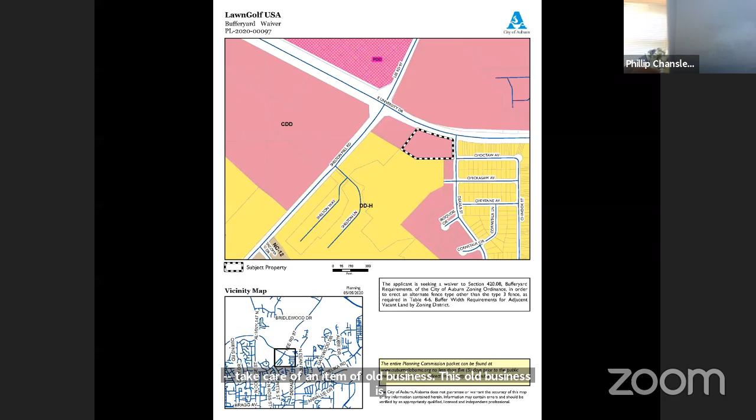All right, I'm seeing no hands raised. So seeing no one, I'm going to move along. The first thing we'll do is take care of an item of old business. This old business is LawnGolf USA, PL 2020-00097, a waiver request dealing with the fencing and materials.

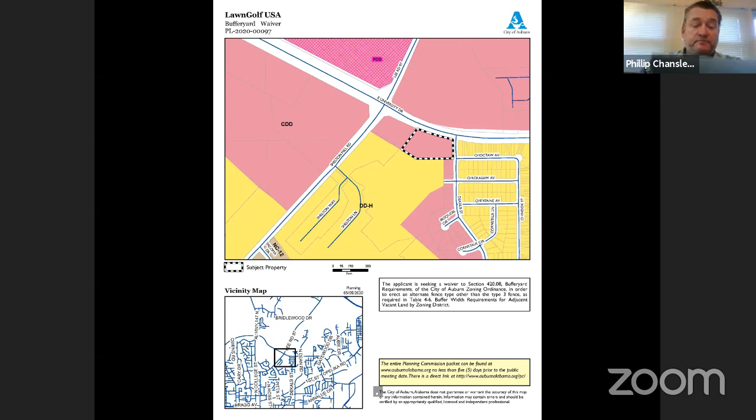Let's have Katie Robinson. Are you there to address this? Yes, I am here. Good afternoon. This is a request from Ron Watson for the property located on the corner of DeKalb Street and East University Drive. They are requesting a waiver to the fence requirements as part of buffer yard requirements for property adjacent to vacant land by zoning district.

The property is zoned CDD and is surrounded by DDH to the south on a majority of that south property line, as well as CDD, which is a single family area. Approximately 483 feet of that south property line is adjacent to the Shelton Mill Townhome development, but that portion is undeveloped at this time, so it's vacant. So they are required a type 3 fence as well as a 20-foot wide buffer.

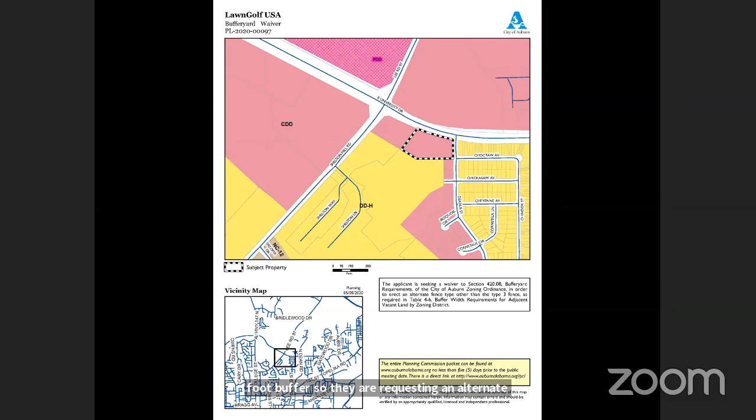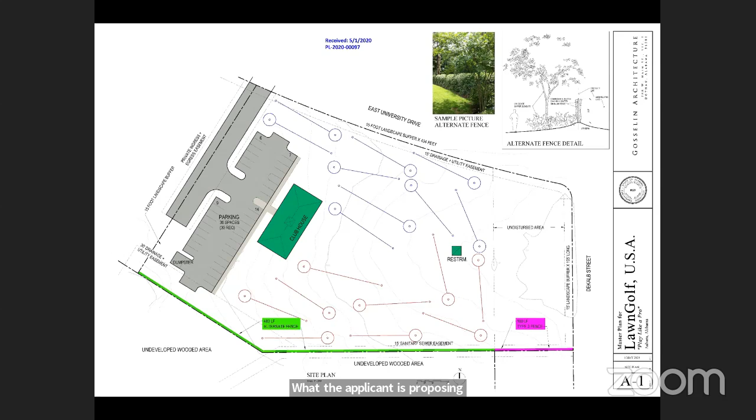So they are requesting an alternate fence type to that type 3. A type 3 fence is a 6-foot masonry wall or stucco type fence, or a 2-foot berm with a 6-foot stockade fence with decorative design, or columns of brick or stone. So what the applicant is proposing is a living green fence along a majority of the property line that would be a vinyl coated chain link fence with Confederate jasmine or another type of vine growing on the fence.

In addition to that living fence, they are also required to do their landscaping requirements along that fence. On the last page of the staff report, I've included the landscaping material that they will be required to plant. We do recommend approval of the alternate fence with staff comments.

And I will add that the pink portion that you see, since that is the same zoning type as this property, and is a single family performance home, there is no fence requirement in this location. It is, however, a 15-foot wide buffer yard, and the applicant has agreed to provide an actual type 3 fence in this location to separate the single family neighborhood from the property.

Part of the conditions that I mentioned are noted in the staff report, and Water Resource Management has added a condition since your meeting on Monday that although the fence is shown now to be in the location of the 15-foot drainage and utility easement across the south, when the plans come in for development review team, the fence will be located outside of that easement. And I received no correspondence on this case.

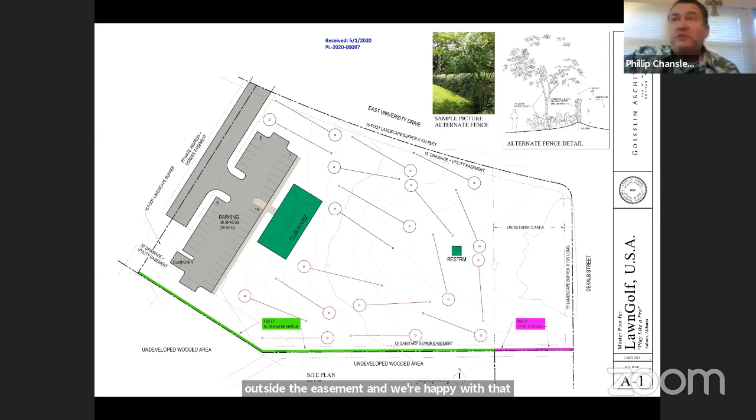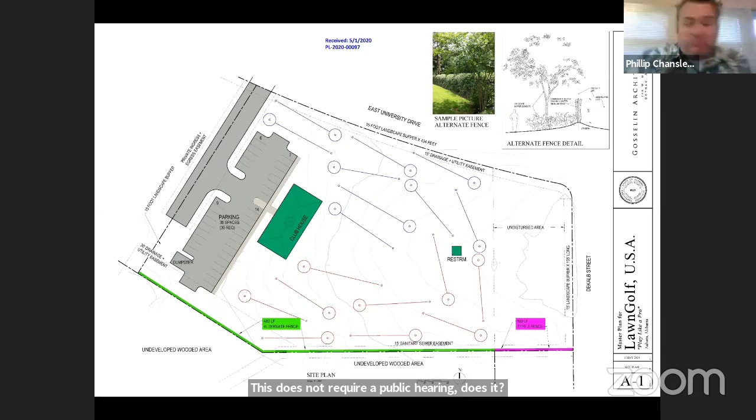Is that it? All right, so, sorry Forrest, this does not require a public hearing, does it? No, sir, waivers do not. Right, okay. So that brings it up to any kind of discussion or a motion.

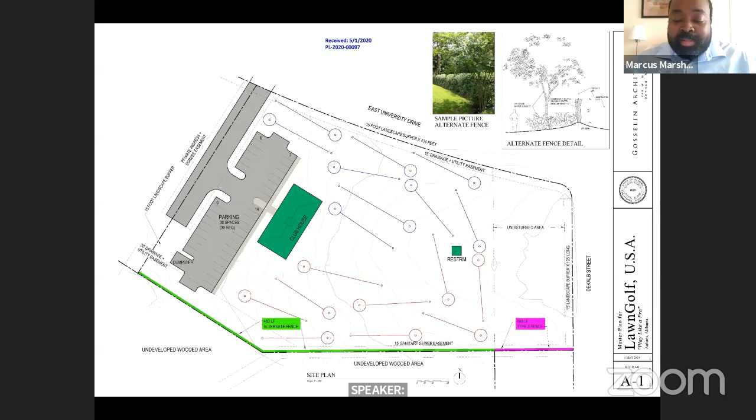Okay. I know last time I had a potential issue with the multiple waivers and things going on. But if the staff is comfortable with this type of fence, then I'm comfortable as well. So I'm ready to make a motion, if that's okay.

I'll make a motion. Move to approve PL 2020-97, LawnGolf USA Buffer Yard Fence Waiver, with all staff comments. And I will second that. I appreciate the living fence. Thank you.

Okay, so now we have a motion and a second. Is there any further discussion? Okay, hearing none, seeing no hands. All those in favor, let's see, I guess we're doing a roll call, right?

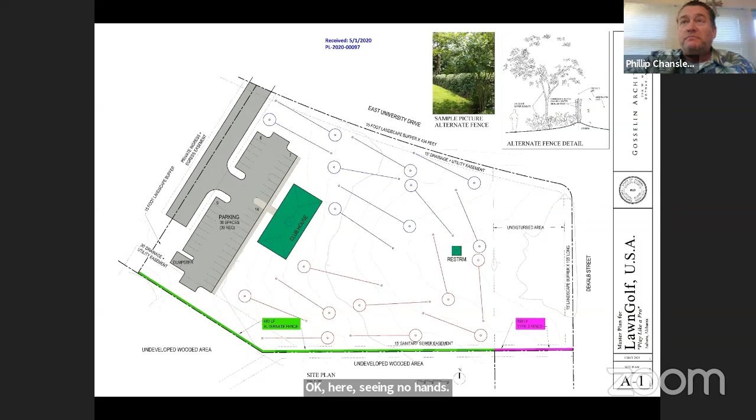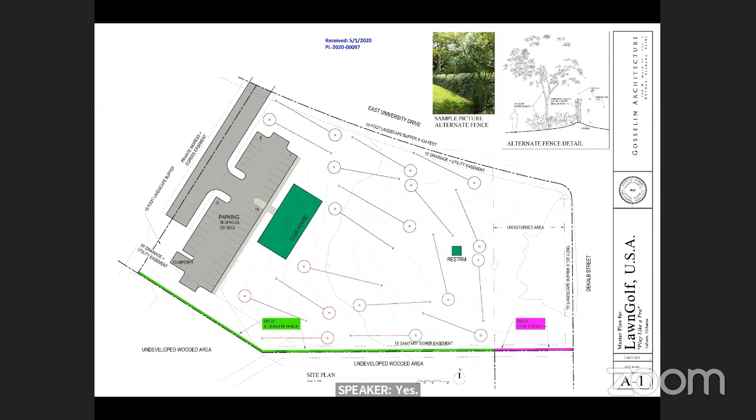Amber? Yes, I'm ready. Bledsoe, Yes. Chansler, Yes. Lazenby, No. Marshall, Yes. McCord, Yes. Reese, Yes. Reitenbaugh, Yes. Okay, that motion carries.

Okay, we're going to move into the next item, but we have a consent agenda, and we've also got a number of issues that the applicant has asked to postpone. There's a total of 8 of those items that will be taken from the agenda tonight. Now, what I'd like to do is try to dispense with all that right here up front. I'm going to go through a number of administrative tasks just to handle it, so see if we can follow along here.

So the first thing I'll do, before we address the consent agenda, is note that one of the items to be postponed till the next meeting is PL 2020-00155, the Gibson property annexation. The first order of business would be to make a motion from the chair to remove this particular item from the consent agenda. Do I have a second?

Second. A motion and a second. Is there any discussion? This item will be postponed. Okay, hearing none. All those, let's have a quick vote. Amber, this is to remove the item. Yes. Chansler, Yes. Lazenby, Yes. Marshall, Yes. McCord, Yes. Reese, Yes. Reitenbaugh, Yes. Okay, motion carries.

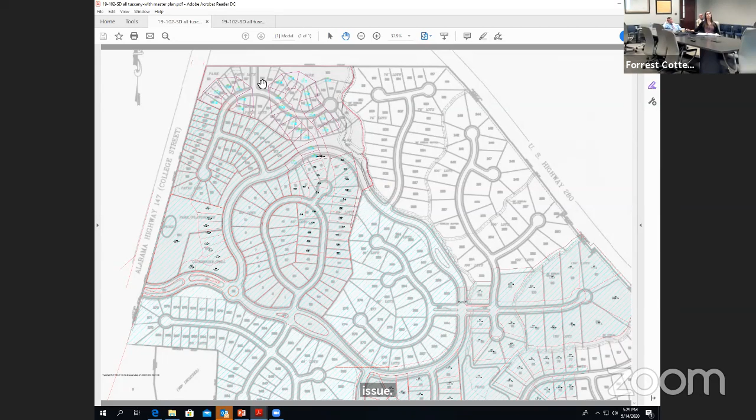Yes, I would like to add a couple things. One, the two cul-de-sacs, on Canal and Sophia that terminate, the original layout had 40 plus lots up in that area. Because of the rock and topography, we are approximately 20 plus lots in those areas, so we've had to decrease the number of lots. I was also working for Trey Salato and Dennis McIntyre when they were doing this original phase, and Trey said they thought they were opening a subdivision, but what they really opened was a rock quarry. They spent a significant amount of time blasting rock trying to make it work, and it essentially bankrupted them, so we're trying to avoid getting into a money pit.

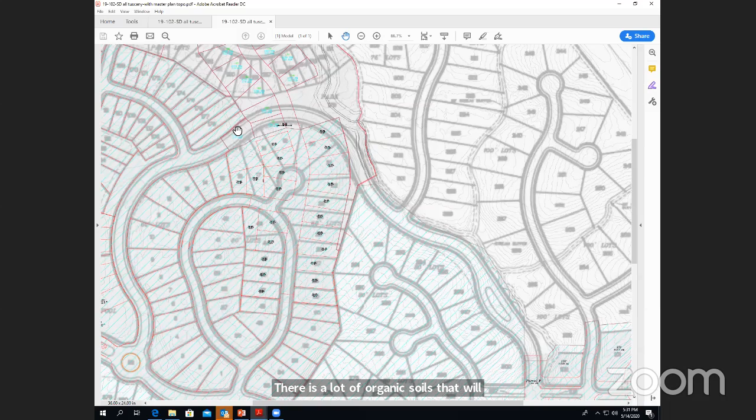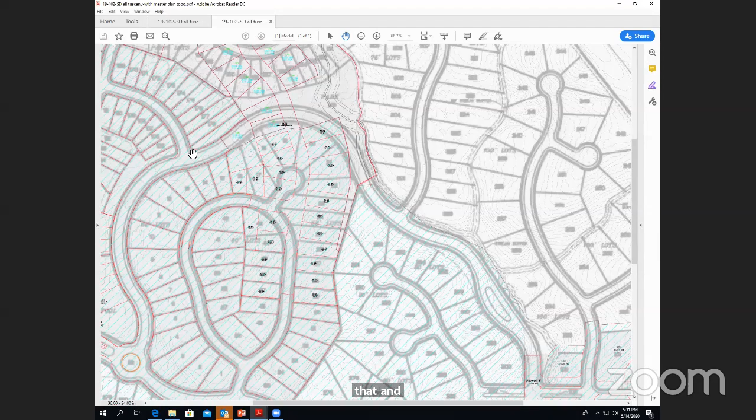So that's as far as the connection on Sophia and Canal. I'd like to address the connection on Tuscany or Tivoli Boulevard, the connector road that goes along the creek in the master plan. Were we to carry that forward, we've done soil borings out where that boulevard would connect in a big loop, and there's a lot of organic soils in that area. That's the lowest point on the road, and bringing a road through there would be damaging to the ecology and difficult to build. On top of that, a large portion of that road planned in the master plan has since already been developed by Stowe Martin Builder to the east. So there's really not an easy way to bring that stub road through without losing stormwater detention and placing the road in an ecologically sensitive area with the creek that runs along the east side of this development. If you have any other questions, I'm listening in, glad to answer anything else.

Okay, thank you. I guess I'd like to turn to Ms. Frazier and see if this is all information you've had before, and whether comments stand.

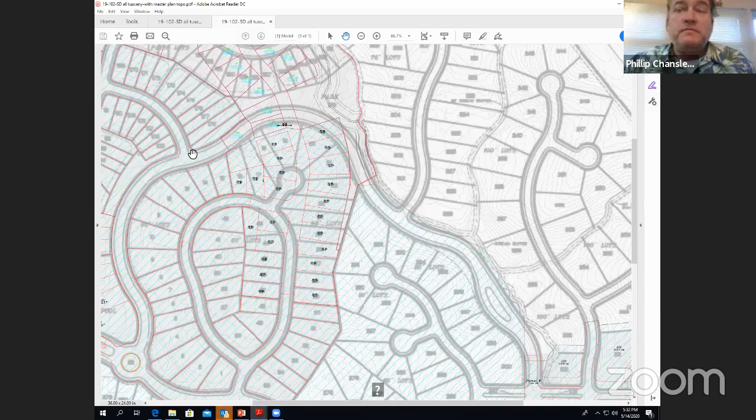Yes, we did receive this information from the applicant. We do understand there's rock there. It's not an impossibility to build on, but it does create some challenges. There is additional information Mike nor Brandon mentioned. There's an existing stub of Tuscany Hills Drive near where Stephanie's hand is, right there. The current road ends right there as well, and they're also proposing not to continue that through to at least connect to Sophia Court.

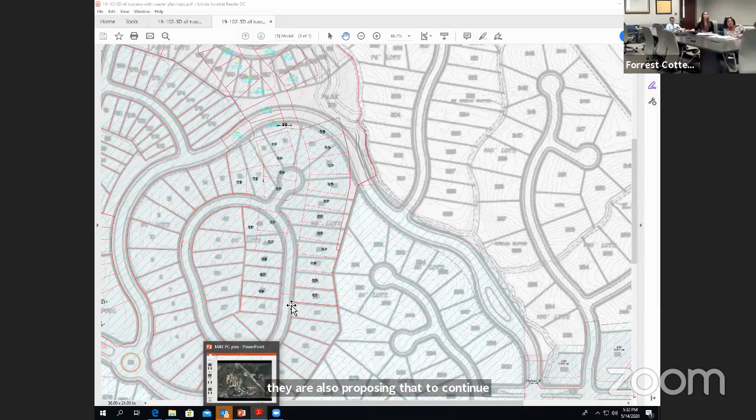If you go back, can you go back to the aerial? So it does just provide additional connectivity. So at the end, yes, right there, the existing roadway stops there, and the applicant is proposing a lot at the end of that. We would definitely prefer that it connect through to Sophia Court as well.

Is that the stub out you reference in the comments? Yes, it is. Okay.

Warren McCord: Yes, I'd like to ask Mr. Bolt and others representing the applicant. One of the things we often hear when we talk about things like stub outs, and you are dealing with a very difficult thing, but you always talk about it in generalities. Can you give me some specifics as to what kind of economic liability you would be taking on to try to make at least one or more of these connections? You just say it's going to be a money pit. What are we talking about? Can you phrase that in terms of cost per lot or something? The owner has reached out and tried to get some cost estimates, but it's very difficult to get cost estimates on blasting.

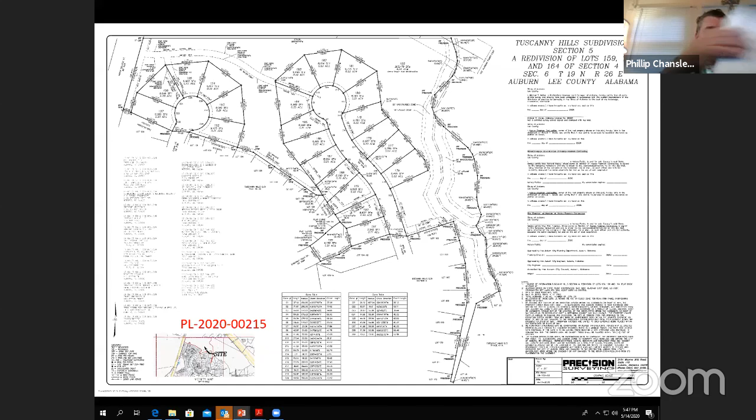Well, I guess that gets us to a point where — Warren McCord, please. Yes, I just want to clarify with Mr. Bolt. We had been talking about the problems of connectivity in these other places because of rock and the cost of blasting, and that was fairly convincing to me. However, when we talked about this connectivity, he merely said he and his traffic engineer thought that it provided no useful purpose. I'm trying to figure out, is he talking about useful purpose to his project, or useful purpose for circulation that's concerning our engineering staff?

Well, in particular, so the construction plans were checked for what you see as drawn. I'm sure there is rock there, but that design hadn't been done. The not connecting those two — we didn't see that there was a benefit for circulation. So we're basically dealing with two different opinions, I guess. Okay.

Okay, I guess that brings us to a point where... can you pull me back to the other map of this, where it shows the actual Tuscany Hills, Canal, and Sophia?

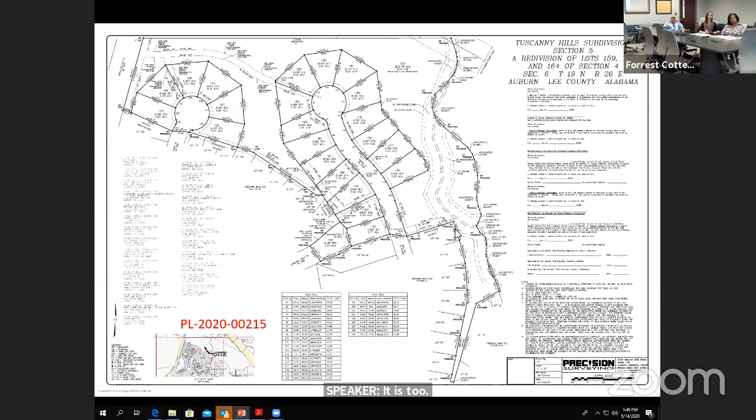Personally, I'm prepared to make a motion. I don't know where everybody else stands. I'd like to move to approve PC Case PL 2020-00215, Tuscany Hills Section 5 preliminary plat with staff comments, while omitting connectivity between Sophia Court, Canal Court, and Tuscany Hills Drive.

That one comment, I can second that motion. Okay, we have a motion and a second. Is there any further discussion from the commission? Yeah, Mac Lazenby, yeah.

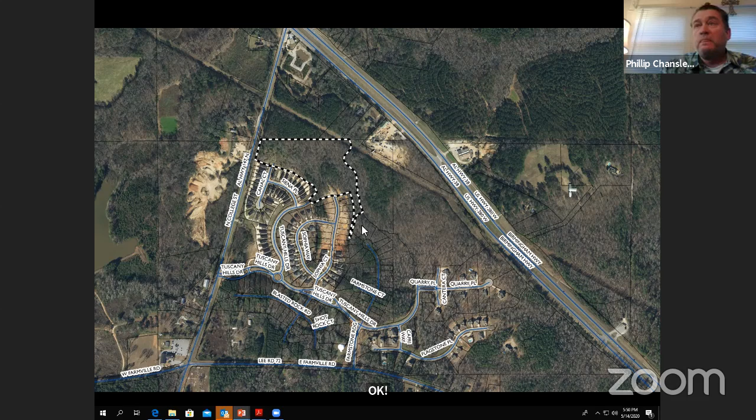Break that motion down a little bit. You're insisting that the cul-de-sacs be connected, if I understand right? I am... yeah... not insisting they be connected. Okay, all right, I understand. Thank you.

But she is, clarification is warranted. She is insisting, though, that the comment regarding the stub out of Sophia Way to the undeveloped property to the east stay in the comments. Is that correct? I will amend that to remove recommend stub out of Sophia Way to undeveloped property to the east.

Oh, you take both of those out. You're correct, I'm sorry, yes, I'm amending the motion. All right, so now we have an amendment. Okay, so the amendment is... the motion was approval with all staff comments except the connectivity comment. Now there's an amendment to that that says also remove the stub out comment.

So let's have a vote first, let's have a vote on the amendment first. Go... I'm not sure it has a second. No, it does not have a second. My second was the first part of that, her first amendment. Sorry, do we have a second to the amendment?

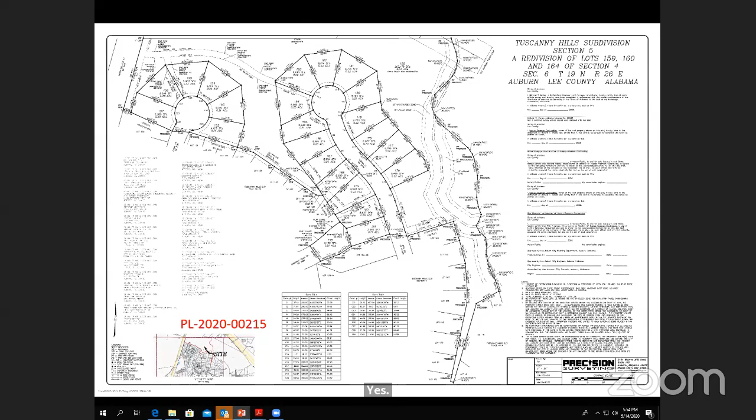Okay, Bledsoe, no. Chancellor, yes. Lazenby, yes. Marshall, yes. McCord, yes. Reese, yes. Reitenbaugh, yes. Okay, that motion carries.

All right, we're going to move on to item number 15, which is Woodward Oaks Phase 2, PL 2020-00228. This is a preliminary plat approval for a performance subdivision. Mr. Kip.

Yes, everybody hear me? Can now. All right, this is a preliminary plat request for a lot subdivision in Woodward Oaks Phase 2. You recently saw this approved overall subdivision back in September. The purpose of this replatting is essentially to create one new lot. The property owner is Clayton Properties Group Incorporated, and their authorized representative is Brett Basquin. Here, you can see the lots there. That kind of rectangular lot is the new lot being created. And Forrest, if you could advance to the next slide, please.

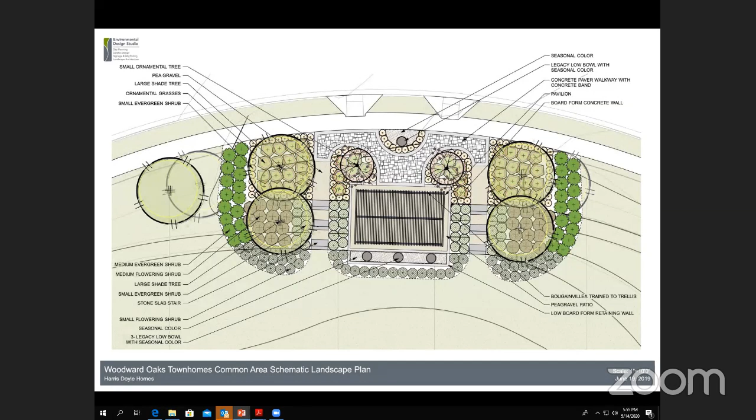They're wanting to subdivide out this lot to do a kind of community pavilion. Staff has no objection to this, and we recommend approval. And there's an aerial of the property and surrounding development.

Okay, thank you. Mr. Basquin, if you have anything to say, raise your hand. Otherwise, I'm going to move along. Okay, this requires a public hearing, so at this time I'm going to open the public hearing for anybody who would like to speak. So please raise your hand.

27 attendees, seeing no hands raised. I'm going to close the public hearing and ask for questions, comments, or a motion from the commission.

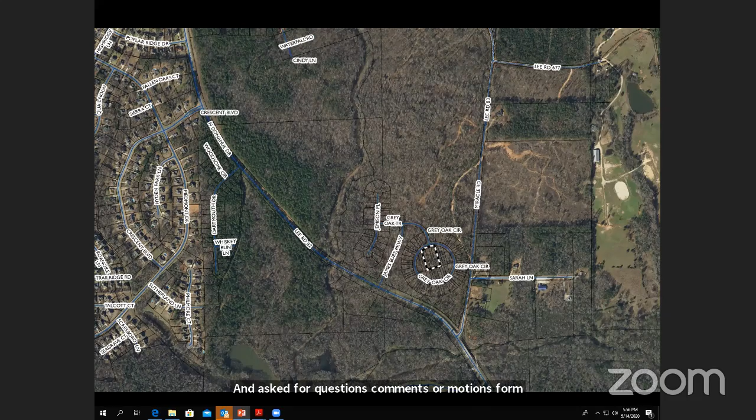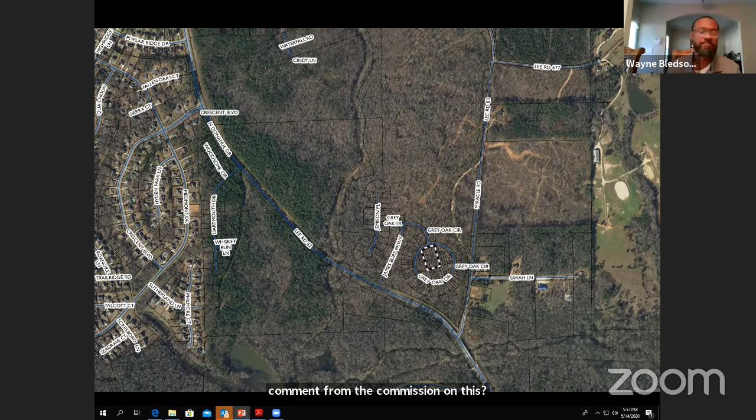I move to approve item 15 on the agenda with staff comments. Second. Okay, I have a motion and a second. Is there any further discussion from the commission on this? All right, let's have a vote. Bledsoe, Yes. Chansler, Yes. Lazenby, Yes. Marshall, Yes. McCord, Yes. Reese, Yes. Reitenbaugh, Yes. Okay, motion carries.

The next item is Woodward Oaks Phase 2. This is the final plat for the same property, case PL 2020-00229, and it does not require a public hearing. Is there questions, comments, or a motion from the commission?

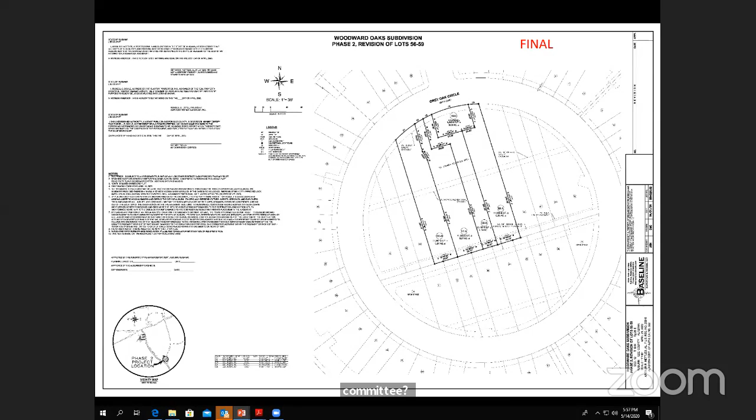Move to approve item 16 with staff comments. Second. Motion and a second. Any further discussion? Bledsoe, Yes. Chansler, Yes. Lazenby, Yes. Marshall, Yes. McCord, Yes. Reese, Yes. Reitenbaugh, Yes. Okay, motion carries. The next item on the agenda is Yarborough Farms Sawgrass.

It's a redivision of lots, PL 2020-00240. Mr. Howell: Good evening. This request before you is a request for preliminary plat approval of a 4-lot performance residential subdivision of 2 lots. As you can see on the proximity map here, it's roughly at the intersection of Titleist Way and Yarborough Farms Boulevard in the Yarborough Farms Planned Development District, with a CDD base zoning district.

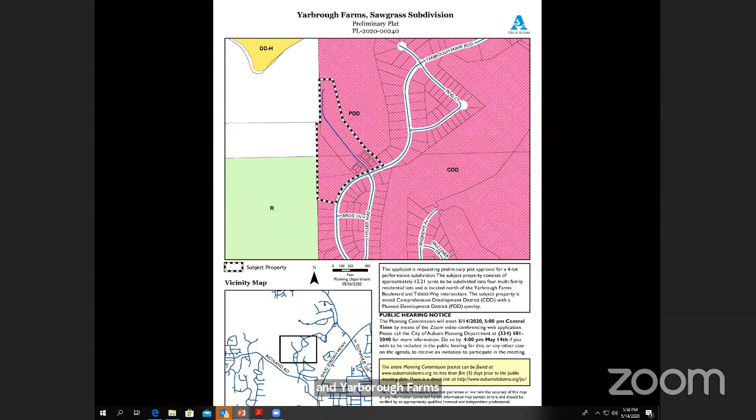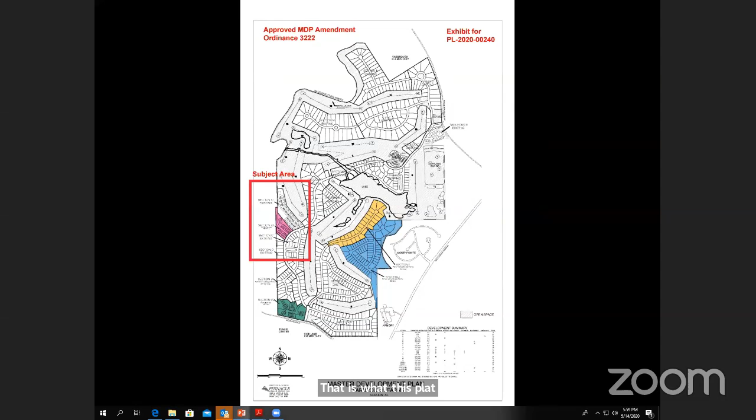Next slide. This plat is roughly the general area, the subject area. It includes section E2, E1, and the northern portion of section D of the master development plan for Yarborough Farms PDD. The plat itself is in keeping with the MDP. Most recently, it was approved by the city council to change the use types from section E2 from single family to multifamily, and that is what this plat proposes, with 19 units as was allowed. Next slide, please.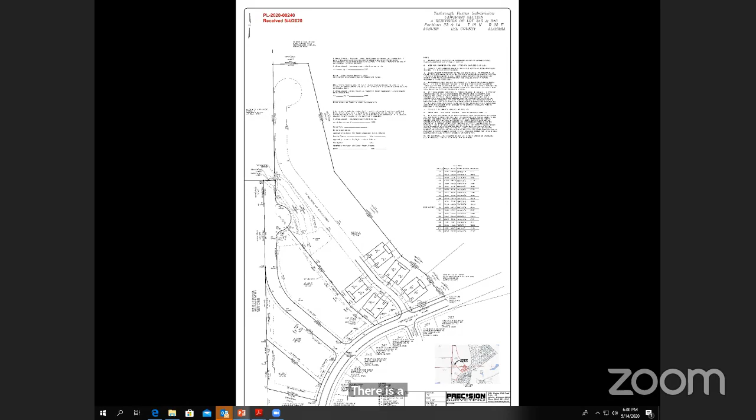Phil, you're on mute. I'm looking over at the attendees. Mike Mayer, if you're still there and want to say something, raise your hand. If not, we'll go ahead and move along. So this requires a public hearing. At this time, I will open the floor for the public hearing. If you'd like to speak on this item, please raise your hand and I'll recognize you. 27 attendees, I see no hands, and so I will close the public hearing and ask the commission for questions, comments, or a motion.

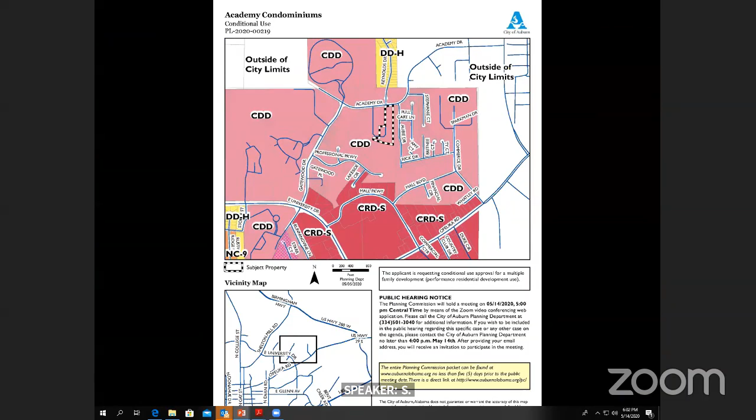I move to approve item 17 with the staff comments. Second. Okay, we have a motion and a second. Any further discussion? Bledsoe, Yes. Chancellor, Yes. Lazenby, Yes. Marshall, Yes. McCord, Yes. Reese, Yes. Reitenbaugh, Yes. Okay, motion carries. All right, the next item is item number 18, the Academy Condominiums, PL 2020-00219.

Ms. Kennedy: Yes, this application comes from Rob Selby on behalf of CLNS Subdivisions LLC, which are the property owners. They're requesting conditional use approval for a performance residential use, which is a multifamily development at 1630 Academy Drive. This is within the Gardens at Gatewood subdivision, east of the Gatewood Drive intersection of Academy Drive, as you can see in this map. The property is on CDD.

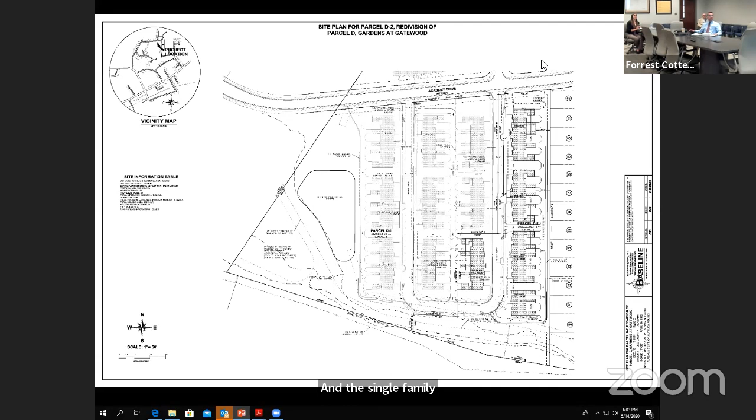The development being proposed consists of 5 new buildings and 23 condo units. This section of the development is located between a previous phase of the multifamily development, as you can see to the west there, and the single family portion of Gardens at Gatewood. The proposed use is in line with the surrounding neighborhood, as you can see, it's mostly residential. The future land use plan has it designated as medium to high density residential, so it is in line with that as well.

This master site plan was originally submitted in May of 2004 for the original conditional use. We're bringing it up to you again now because there has been a lot of communication regarding this development and conditional use, so for your information, we've included it. These 5 new buildings, as you can see, are in line with the original proposed master plan. On parcel B, on the northeast side of this plan, that portion also went through an additional conditional use application in 2017, which was approved, and is in line with this as well.

These items have been brought back to the commission due to the time passed since the original application, as well as a name change to Academy Condominiums rather than the Gardens at Gatewood Condominium. As I mentioned, we've received numerous communications regarding this case. I believe a lot of the attendees are folks wishing to speak in the public hearing, so we had a lot of calls on how to register as well as basic information. We did receive 2 emails wanting a little bit more detail or expressing a bit more concern, so I'd like to go ahead and address those for you.

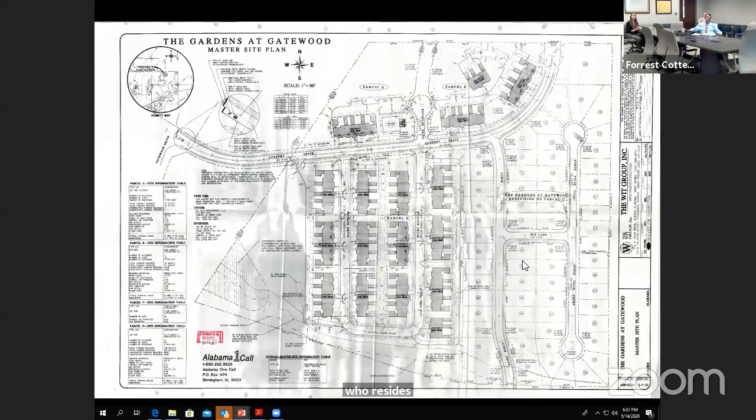The second email we received was from a Mr. Agnew, who resides at 1992 Stephanie Court, which is part of the Hilltop Pine subdivision, adjacent to the single-family residential portion of the Gardens at Gatewood. His email concerned density of the housing of the area, as well as associated open space in relation to that density.

In response to his email, we've evaluated the overall open space of this multifamily development in accordance with Table 4.2 and Section 505.06 of the zoning ordinance. Table 4.2 states that any performance residential development in CDD must have 25% open space, and Section 505.06 states a stage development in CDD must have open space ratio of 15% per stage.

Previous stages of this development have exceeded the 15%. That would include parcel B, this previous development to the west of the proposed, and parcel A, where the pool is located. All of those sections exceeded their 15%. The entire multifamily development prior to this new construction is at 29% of its total area being open space, so it exceeds the regulations set forth in the zoning ordinance.

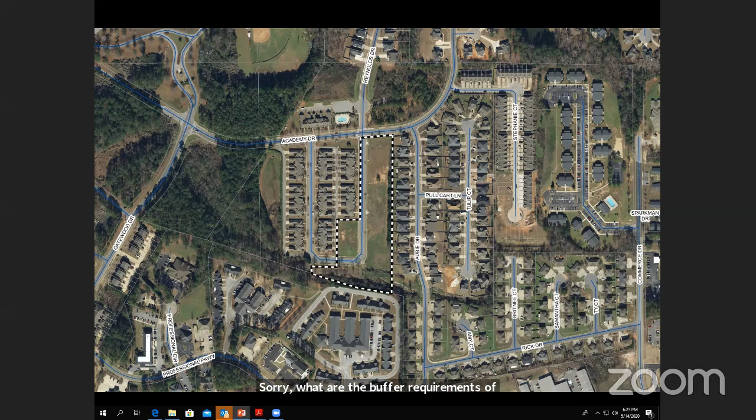You have to unmute there, Mac. Sorry, this is to staff. What are the buffer requirements or fencing requirements on the east side of this property, as it butts up against the single family homes? Have they met those requirements or exceeded them? I'd just like to know what they are.

If not, I'm looking for a motion. I move to approve PL 2020-00219 with staff comments. Second. I have a motion and a second. Any further discussion from the commission?

All right, Ms. English. Bledsoe, yes. Chancellor, yes. Lazenby, yes. Marshall, yes. McCord, yes. Reese, yes. Reitenbaugh, yes. Okay, motion carries. Item number 19, Graduate Hotel, PL 2020-00223, Mr. Kip.

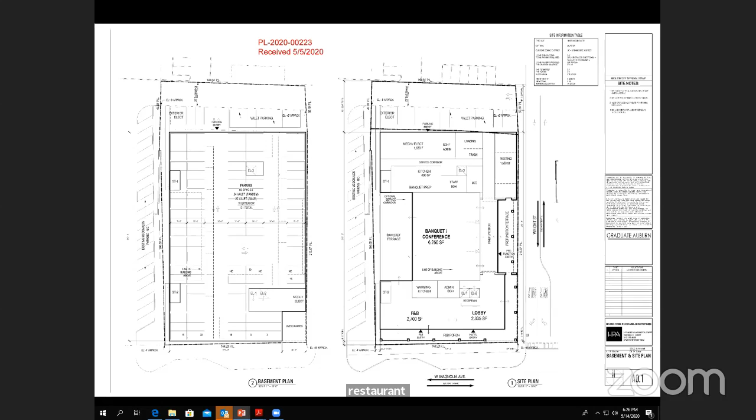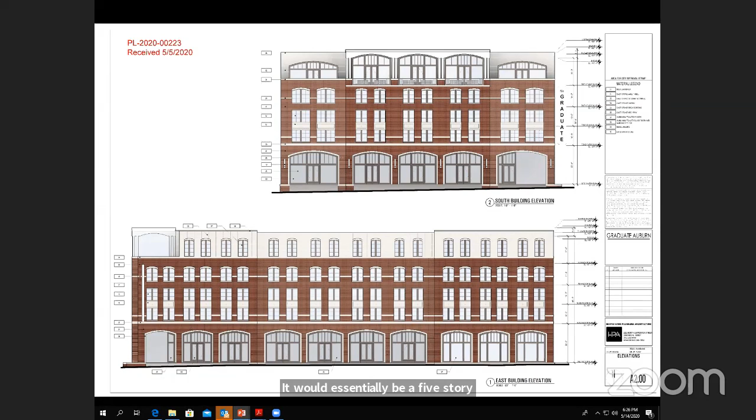Here's a site plan showing that some of the parking would be below ground. There'd be a banquet conference center, lobby, restaurant, and fitness center. If you could advance to the next slide, please. These are some preliminary renderings of the architecture. These would go before the downtown review committee, but it would essentially be a 5-story hotel with 177 hotel rooms, along with the additional amenities I mentioned.

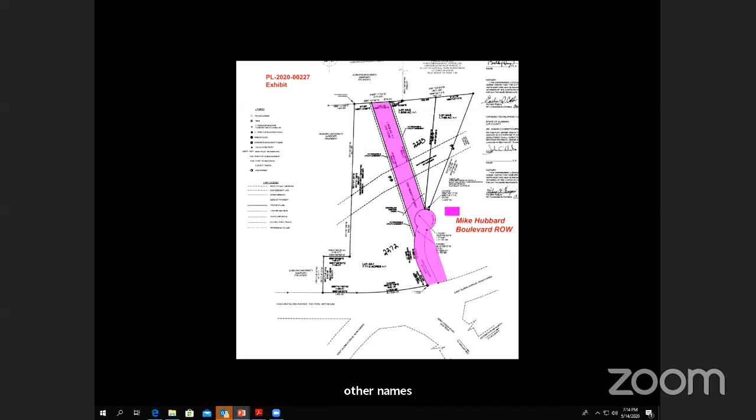We did receive some correspondence on this, including recommendations for other names and considerations. The first was a recommendation to consider the name Benny G. Atkins, and the second was a consideration to rename it Robert G. Pitts.

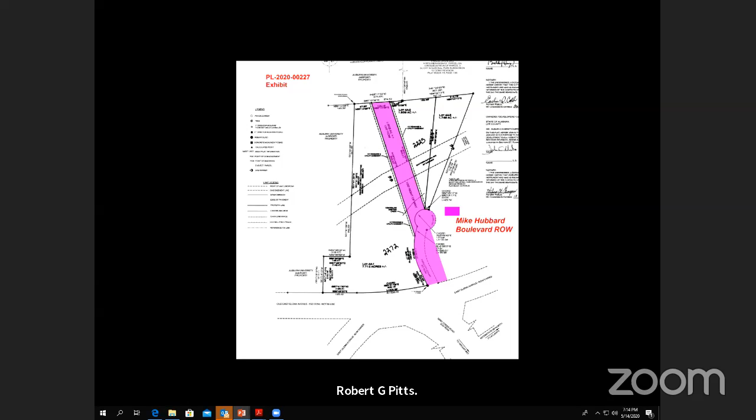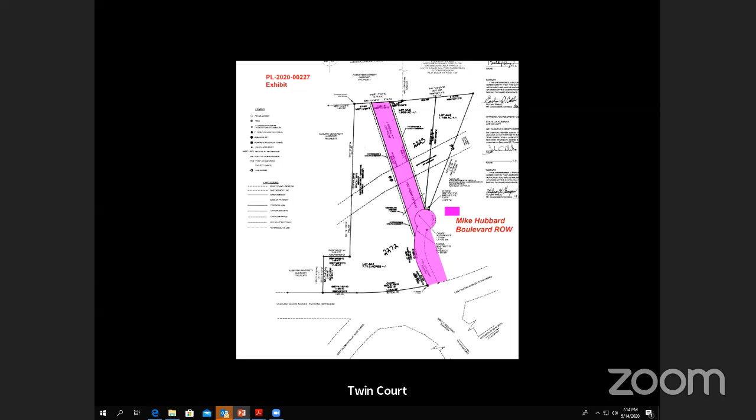The picture before you is the right-of-way of what is currently Mike Hubbard Boulevard, showing the original right-of-way of Twin Court, and then the extension beyond it in 2008. Again, staff recommends approval, subject to any questions.

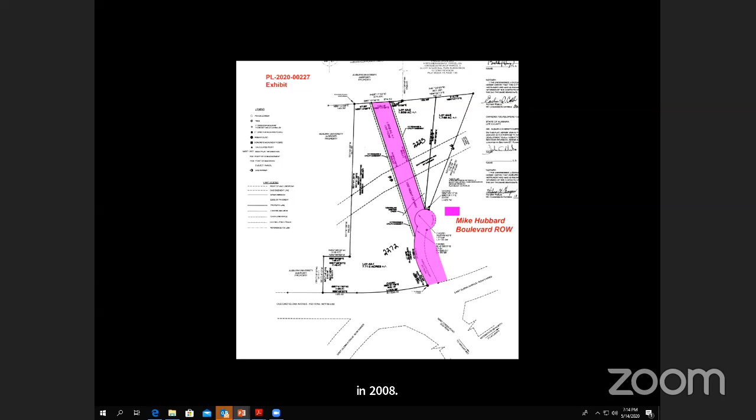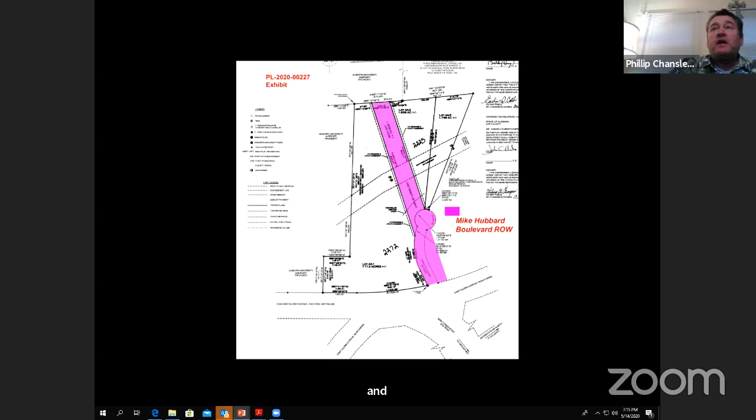Looking at 15 attendees, and there are no hands raised. So I will close the public hearing, and we'll move on to questions, comments, or a motion.

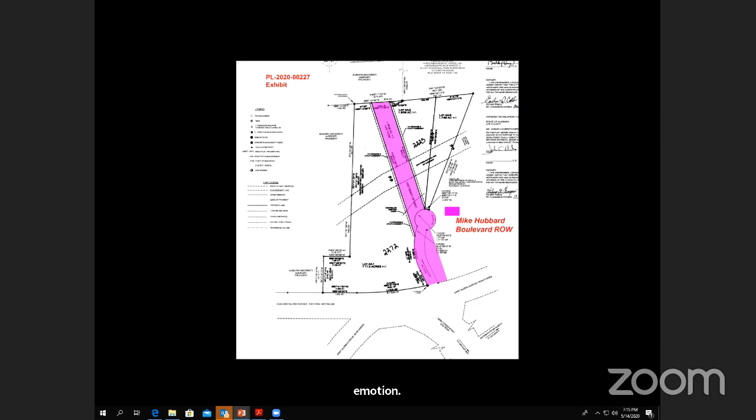It's Mac. I'd make a motion to approve item number 20 on the agenda as recommended by staff. The other names that were suggested were certainly honorable, but I think we discussed those at length at the packet meeting. Second the motion. Motion and a second. Any further discussion?

Okay, Amber? Bledsoe, yes. Chancellor, yes. Lazenby, yes. Marshall, yes. McCord... Warren, oh he's muted... oh yes. Sorry, there you go. Reese, yes. Reitenbaugh, yes. All right, motion carries.

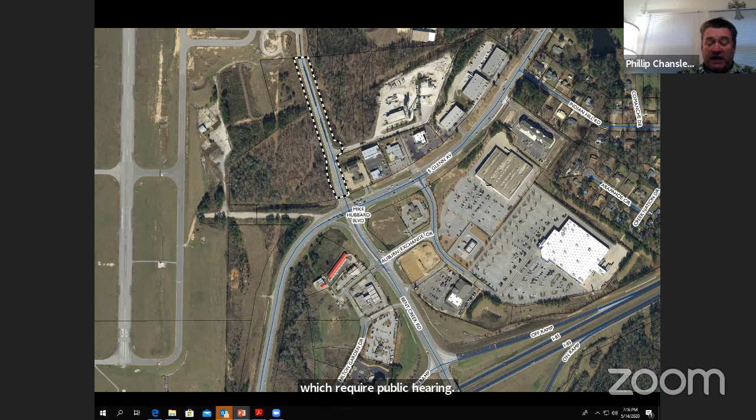Okay, moving along to our last couple of items, neither of which requires a public hearing. The first is item number 21, East Auburn Distribution Substation. This is case 2018-00710. Mr. Cox? Yes, sir.

This is a request for a one-time 6-month extension of a conditional use approval for the Alabama Power Substation located on Dean Road. You've got a number of exhibits in your packet. Essentially, their approval is scheduled to expire the middle of next month. They've had some logistical issues and challenges. They've got a very large project underway where one sequence leads to another, and the sequencing is fairly rigid, so because they're working on something else, they can't get to this right now. The prior sequence needs to be online before they can finish this up. So they've asked for a 6-month extension, which should give them the time they need to get everything finished by roughly mid-December.

Okay, thank you. Well, like I said, this does not require a public hearing, so any comment, motion? Move to approve item 21. Second. We have a motion and a second. Further discussion? Let's see, any?

Amber? Bledsoe, yes. Chancellor, yes. Lazenby, yes. Marshall, yes. McCord, yes. Reese... did she drop out? Dropped out. Okay, Reitenbaugh, yes.